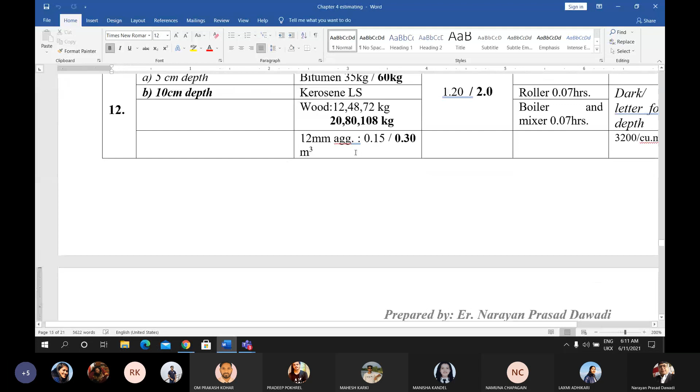Hello? Hello? All of you hearing me? Hello? Hello? Please, someone talk with me here. Have you heard me or not? Hello? Yes, sir. We are hearing, sir.

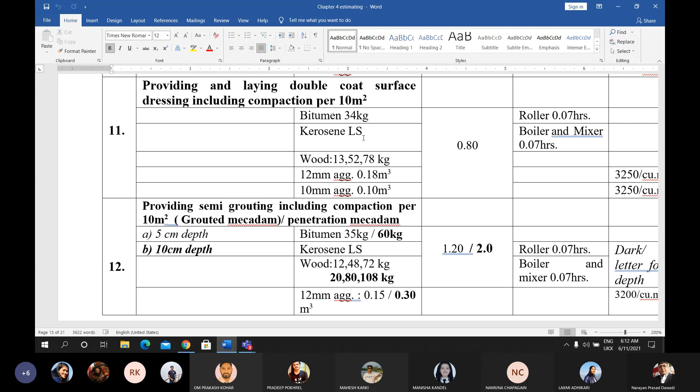And I think I have completed the analysis of rates for the road work, isn't it? Yes, sir. We have started the pipe work. Hello? Let me move to the pipe work. This is the analysis of rates for pipe or sewer line, generally using the hume pipe.

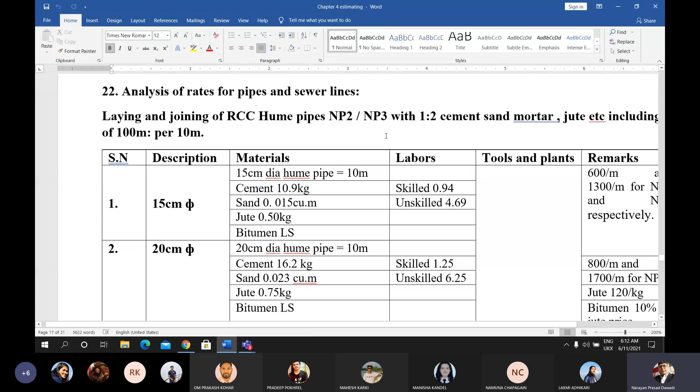Have we finished it or not? Hello? Did we start this in the previous period or not? Hello, please tell me. So, had we started this? Hello? Just started, sir. Up to which number? Serial number. We have just started this, isn't it? Yes. Now, let me start.

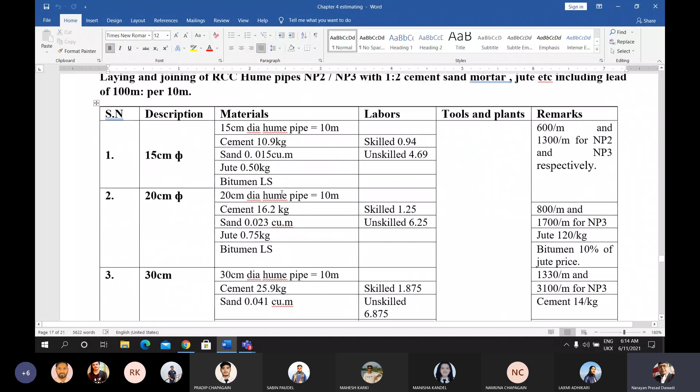Let me start the analysis of rates for the hume pipes or concrete pipe or RCC pipe. This is generally done for the convenience of the sewer lines. And generally, the diameter of the pipe is more than 15 centimeter. And you may be asked in the exam for providing the analysis of rates of hume pipe, providing and laying analysis of rates of hume pipe.

And if you are not given a specific dimension, then you can do it for any dimension also. But if a dimension is not specified, then do it for the diameter of 90 centimeter. Okay, I have a diameter 90 centimeter put here in the bracket. So it is most important in terms of all other dimensions.

Okay, now these hume pipes are generally available in the market, and generally of 2.5 meter length. It has the collar provided, and one pipe is joined with another by inserting the collar into the other pipe, and before inserting the collar, jute is applied as the hemp. That jute is generally immersed in liquid bitumen, and that coated jute goes round the collar of the one pipe, and it is inserted into the other pipe.

And from the outside, the plastering band is done with the help of 1:2 cement sand mortar. In this way, we can join the pipe. And hume pipe is generally available at 2.5 meter. Okay, 2.5 meter length.

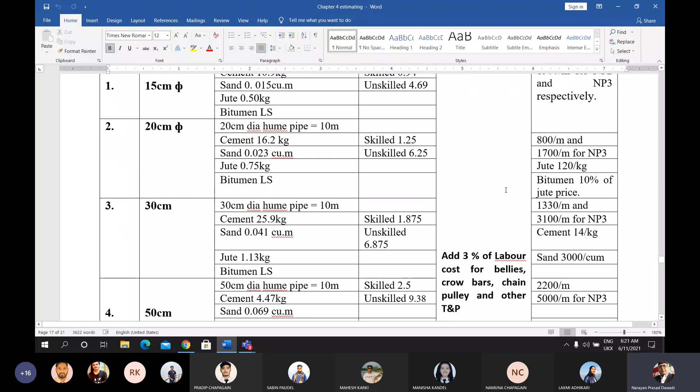That cost may be taken as 3% of the labor cost. 3% of the labor cost is provided as the tools, plants, and equipment cost for lifting and placing of the pipe. Okay. In this way, you add 3% labor cost for ballies, crow bars, chains, pulleys, and other tools, plants, and equipment for the carrying and laying of the pipe. And this is the analysis of rates for 15 centimeter diameter. The skilled manpower is 0.94 number, and for the 15 centimeter, 10 meter length pipe, the unskilled manpower is 4.69 number. This is taken from the norms of the government.

Okay. After putting the value of skilled labor as 1200 per number and unskilled labor as rupees 900 per number, you can do the rate analysis by yourself. You know the rate of the hume pipe. You know the cost of the cement, because cement per bag is 700 rupees. In a bag there is 50 kg of cement, and 1 kg cement will cost rupees 14. Sand per cubic meter is 3000. Jute per kg is 120 rupees, and bitumen can be taken as a lump sum of 10% of the jute price. That total amount can be given for the bitumen.

Okay. Now, for 20 centimeter diameter, in this way I have provided the material, skilled and unskilled manpower, and the rate of the pipes. You can do the rate analysis by yourself by providing the suitable rate of each material. For 20 centimeter diameter, the hume pipe is 20 centimeter diameter, 10 meter, cement 16.2 kg, sand 0.023 cubic meter, jute 0.75 kg, and bitumen lump sum. The skilled manpower is 1.25, unskilled manpower is 6.25, provide 3% labor cost for tools, plants, and equipment. The rate of the 20 centimeter diameter NP2 pipe is 800 per meter, and if you use the NP3 pipe, that rate will be 1700 per meter. This is the rate analysis for 20 centimeter diameter pipe.

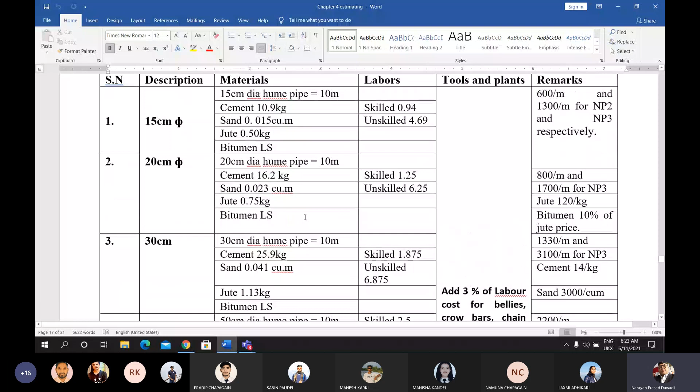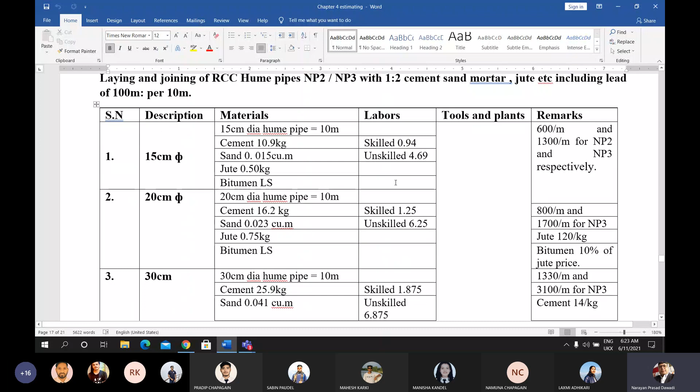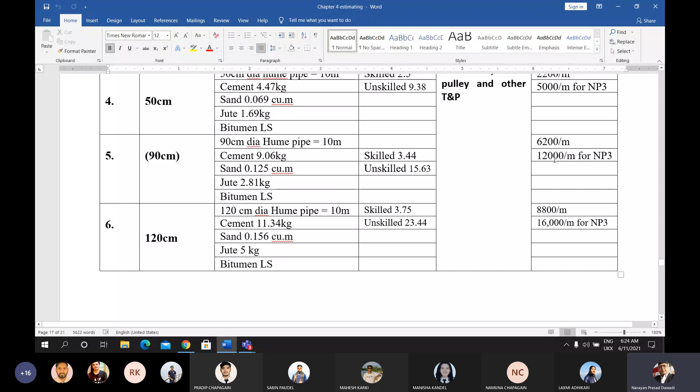In a similar way, you can do the rate analysis for 30 centimeter, 50, 90, and 120 centimeter. If in the exam the diameter of the pipe is not specified, then do it for 90 centimeter diameter. For the 90 centimeter diameter pipe, 10 meter length is required. Cement 9.06 kg, sand 0.125 cubic meter, jute 2.81 kg, bitumen lump sum, skilled manpower 3.44 number, and unskilled manpower 15.63 number. The rate for 90 centimeter NP2 pipe is 6200 per meter, whereas the NP3 pipe cost is 12,000 per meter. This is an expensive pipe. As the diameter increases, the cost rate also increases. This is the analysis of rates for RCC pipe.

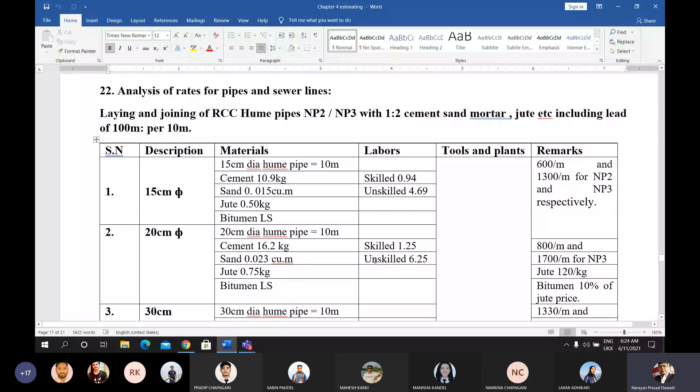You can do it for any other diameter in the exam if the diameter is not specified, but basically do it for 90 centimeter, because we need the higher diameter pipe for laying of sewer lines. Okay, now you can do rate analysis by yourself. Do 5 or 6 rate analyses regarding NP2 or NP3 pipe for laying and joining of RCC concrete pipe or hume pipe.

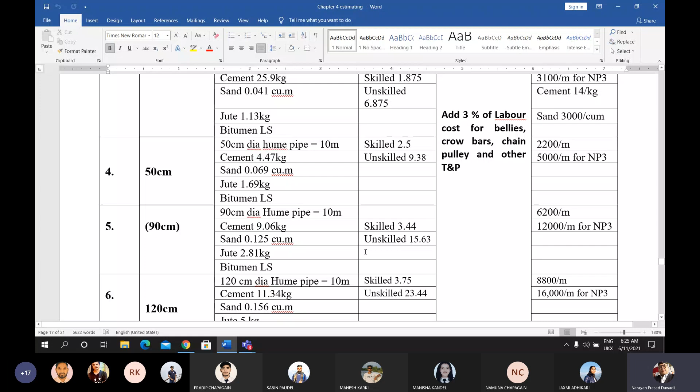बुझे सर बुझे. Now, let me go to another heading: analysis of rates for supplying and laying of GI pipes with fittings per 100 meter. This is another type of pipe, GI pipe. GI pipe is generally used for the water supply and the internal plumbing of the house. And we need different types of fittings for the GI pipe.

There may be a nipple, a tee, an elbow, a gate valve and other fittings used for laying the GI pipe. We need different types of taps and other varieties as per our requirement. For that case, we must know all the things that are going to be installed or supplied according to our need. So I am just providing the analysis of rates for GI pipes, whatever types of fitting are used in the laying of the pipe.

For the fittings, 25% extra length of pipe is considered. Because the cost of the fittings is also very expensive, we have to provide some fittings: sockets, elbow, T, union, nipple, gate valve, different types of valves can be used for fitting the GI pipes. For such things, I have provided a 25% extra length cost for the fittings.

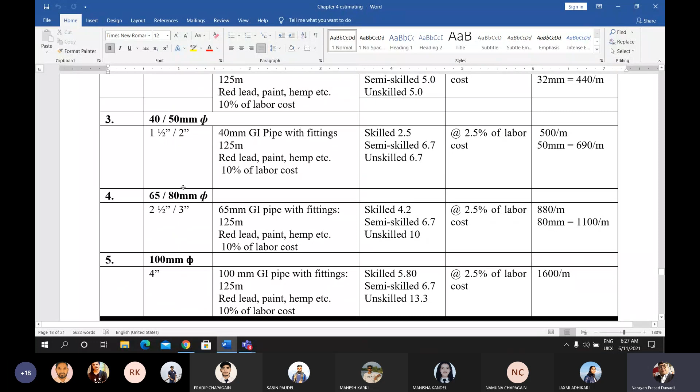100 mm is 4 inch, 80 mm is 3 inch, 65 mm is 2.5 inch, 40 mm is 1.5 inch, and 50 mm is 2 inch. 25 mm is 1 inch, and 32 mm is 1 1/4 inch. 15 mm is half inch, 20 mm is 3/4 inch.

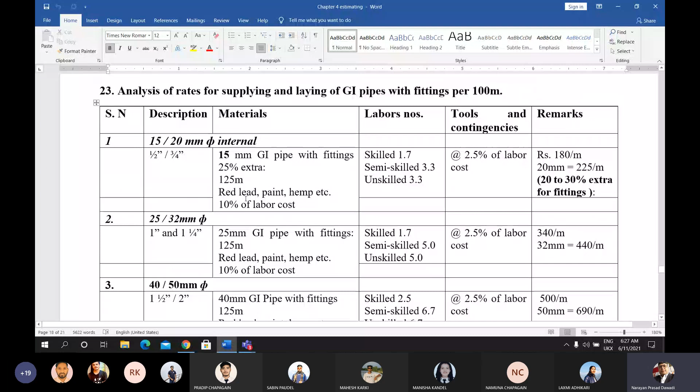These 15 mm, 20 mm, 25 mm pipes are iron pipes coated with zinc, galvanized, and this is called GI pipe, galvanized iron pipe, basically used for water supply lines. GI pipes can be used for the connection of water from the municipality line to the internal plumbing system, or the internal water supply system. Okay, this is the GI pipe.

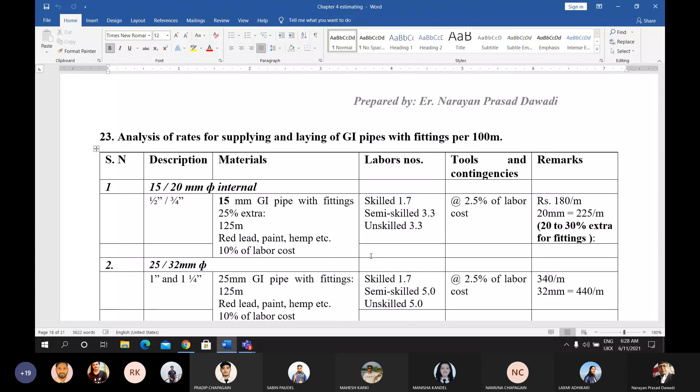The diameter may be different. You may be asked with a different diameter, or the diameter may not be specified in the exam. At that time, you can take any diameter of the pipe and do the rate analysis. For 15 and 20 diameter pipe, the rate analysis is the same, because for fitting 15 and 20 diameter pipe, the skilled, semi-skilled, and unskilled labors are the same. That's why 15 and 20 internal diameter pipes are considered in the same heading.

If you have to provide analysis for the 15 diameter pipe, then write 15 diameter GI pipe with fitting charge 25% extra. If you have to provide 20 diameter pipe instead of 15, write here 20 diameter GI pipe with fittings with 25% extra. In this way you can provide this. For the 100 meter length, if you provide 25% extra, then the length of the pipe will be 125 meter.

And for joining the pipe, we need the hemp, M seal, etc. We need the M seal, we need the hemp for joining the pipe. This red lead is the M seal, and the hemp is the washer.

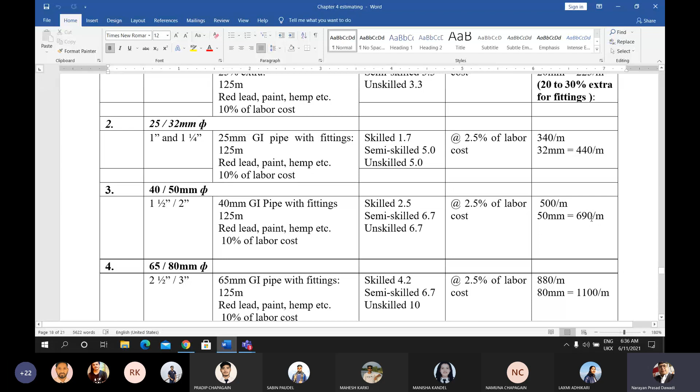And for the 40 and 50 diameter pipe rate analysis, the number of manpower is the same. That's why instead of 40 diameter pipe, if you have to provide the 50 diameter pipe, then you can write 50 instead of 40 here. Other things remain the same, and provide the rate for the 40 as 500 per meter and the 50 as 690 per meter. In this way, do rate analysis for all the diameters of the pipes.

Okay. Hello. Hello. Have you all understood this? Hello. What am I telling here?

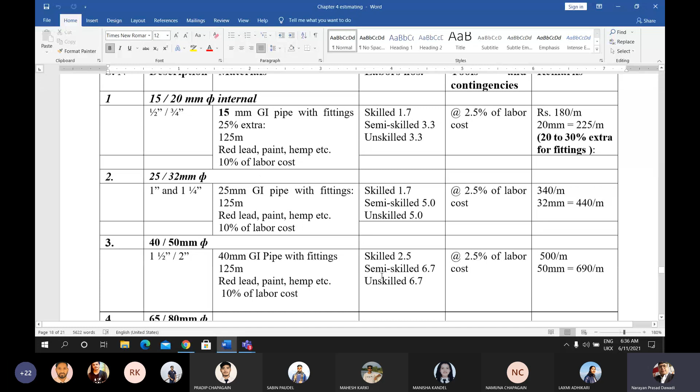Yes, hello sir. Now you can do rate analysis by yourself after knowing these materials, manpower, and the equipment. Okay, you can do rate analysis by yourself.

The rate of the pipe per meter is provided in the remark column. You have to provide 20 to 30% extra. You may take 20% extra, or you may take up to 30% extra.

You can provide here. Okay, for we have the 100-meter pipe length, we need 100-meter pipe length. 25-meter extra is for the cost of fittings - these fittings may be elbow, nipple, socket, T, and other fittings, valves, etc.

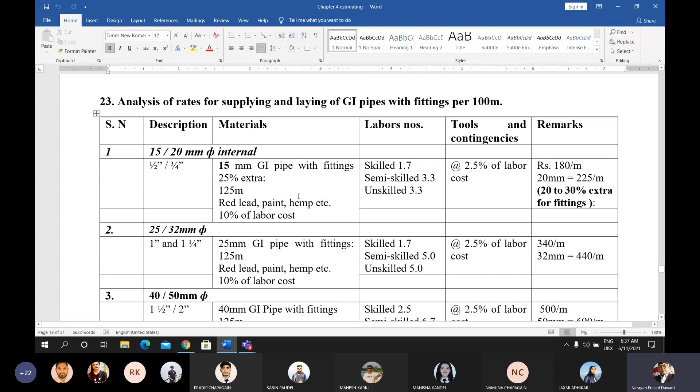And what number of these things are needed here? I don't know, that may be used according to the need of the client. So for that I have provided 25% extra length of the pipe's cost for providing the fittings. Do you understand this?

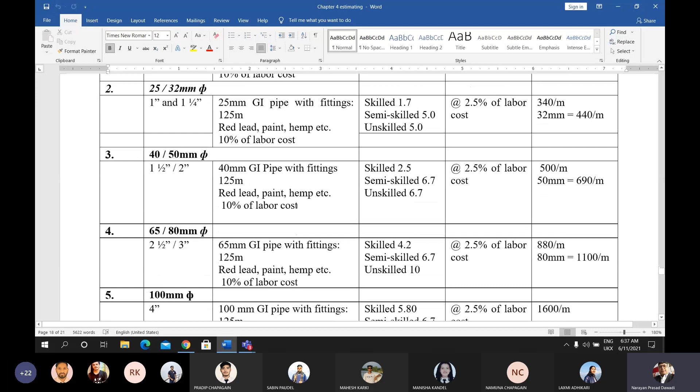Yes sir. Now do it by yourself in the tabular format to know the cost of each 100-meter pipes for supplying and laying, using the rate analysis format.

Now, analysis of rates for supplying and laying of high density polythene pipes. This is the plastic pipe that can be used for water supply as well as for the drainage system - internal drainage system, rainwater drainage system, or other drainage systems using polythene pipe.

Polythene pipe may be available from small diameter to larger diameter - that is, it may be available as 20, 25 diameter, 32 diameter, 40, 50 diameter, 63, 75, 90, 110, and 125, and much more diameters can be available in the market. But in the examination, you may generally be asked about small diameter high density polythene pipes.

They are also used for water supply. If we have to use low cost pipes rather than GI pipes, we use high density polythene pipes. Now the analysis of rates for supplying and laying of high density pipes and fittings for 1,000-meter length of the pipe with the butt welded joint.

That is, the plastic pipe is joined by heating the pipes with a heating mirror, and that pipe is joined - that is the butt welded joint.

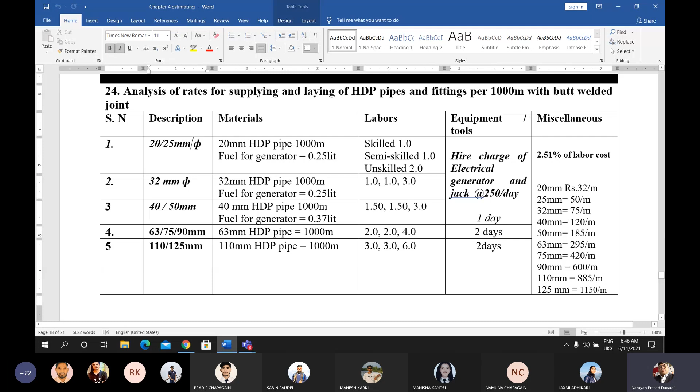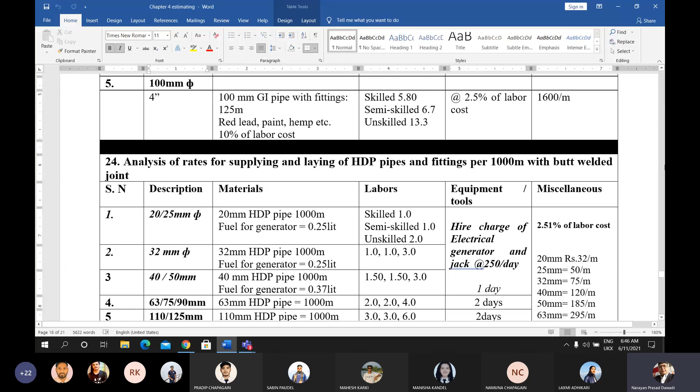Now this is the rate analysis of pipe. I did rate analysis for MS pipe, GI pipe, and high density polythene pipe, but I did not do it for cast iron pipe, because cast iron pipes are generally not used these days, since they are heavy and costly. They are replaced by polythene pipes these days. So I have not done rate analysis for the cast iron pipe.

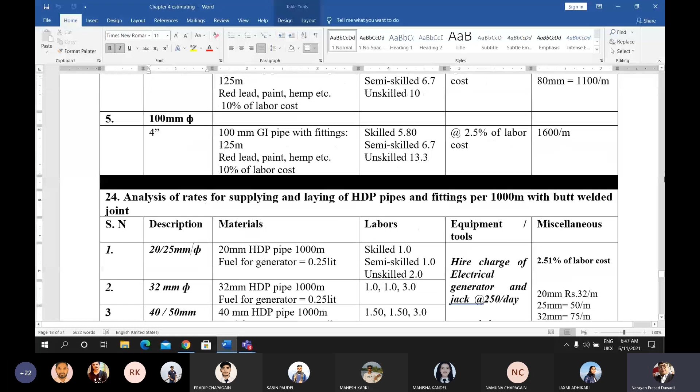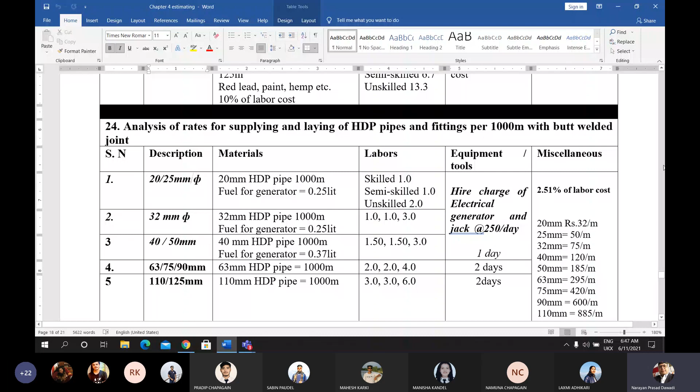That may not be asked in the examination, so I did it for MS pipe, GI pipe, and high density polythene pipe. If asked in the exam and diameter is not specified, do for any diameter; if diameter is specified, do for that diameter. You have to provide rate analysis in tabular format: material cost, equipment cost, labor cost, miscellaneous cost, contractor profit overhead, and contractor tax or VAT. Do a rate analysis by yourself using these materials, labors, equipment, and miscellaneous cost.

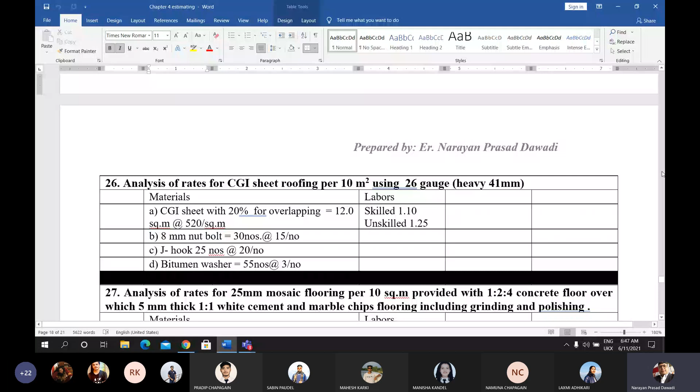Now, analysis of rate for CGI sheet roofing for 10 meters square, using 26 gauge heavy 41 thickness CGI sheet. This is the analysis of rates for the roofing purpose.

We use the Jasta Pata - the corrugated galvanized iron sheet available in the market in different gauges: 22, 24, 26, 28, 30. According to the gauges, there may be three types of tins available: heavy, medium, and light. The thickness of the 26 gauge tin CGI sheet is 41; this is the heavy thickness, and I have done the analysis for this.

CGI sheet for the laying and roofing, using the CGI sheet per 10 meters square of the area, provide 20% extra for the overlapping of the sheet.

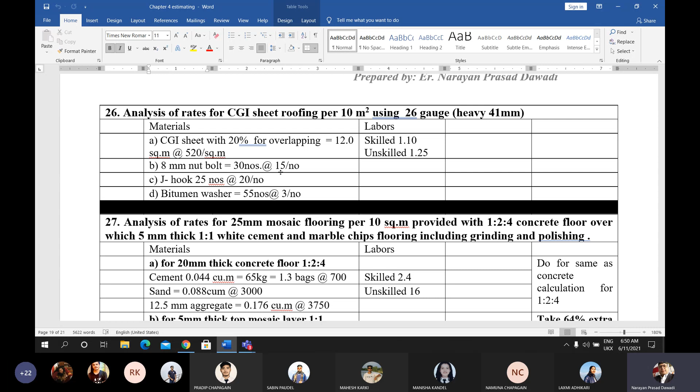In a bundle of tin, there are 72 feet, and one CGI sheet's width is 2.5 feet. If you multiply 72 by 2.5 feet, you will get the total area of the sheet per bundle. You have the rate per bundle as given in the previous slide.

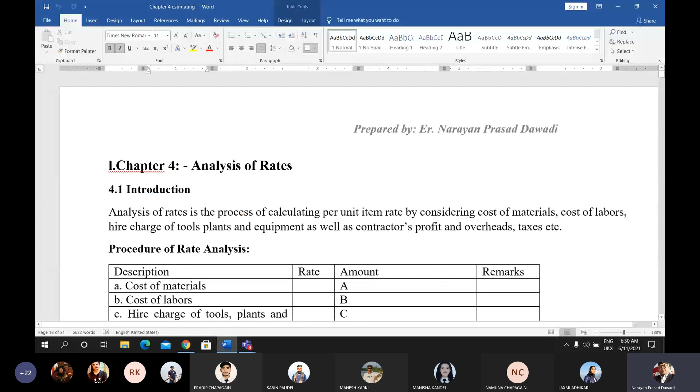If you multiply 2.5 with 72 feet, you will get the total area per bundle of CGI sheet, and that square feet can be converted into square meters by dividing by 10.76, since 3.281 feet equals one meter, and 3.281 times 3.281 gives 10.76 square feet per square meter.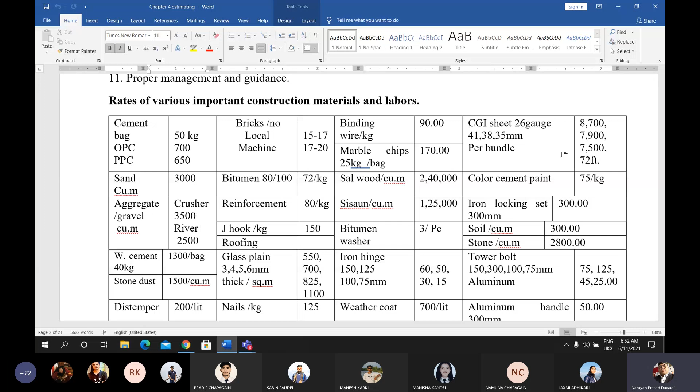So for that bundle square meter, if you use the 41mm thickness 26 gauge sheet, that will cost 8700 rupees, and dividing that by the area gives the per square meter sheet cost. You can calculate this yourself.

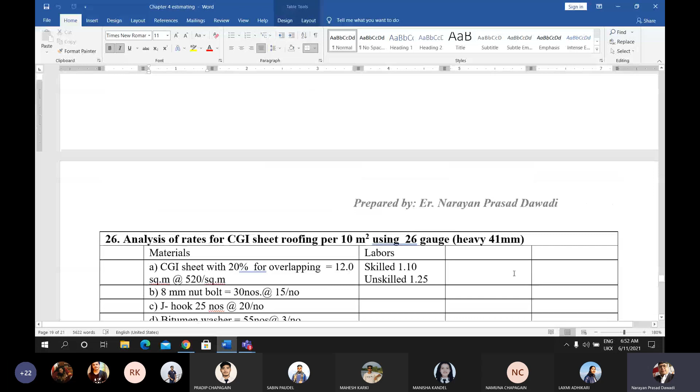So I have directly converted that amount rate here at rupees 520 per square meter. So you know the CGI sheet quantity is 12 square meters, and the rate per square meter is 520 rupees.

Now for roofing purpose, we need nut and bolt hooks etc. for fixing them over the rafters, battens or purlins provided for roofing purpose, and you may use 8mm nut bolts.

30 numbers are used for the 10 square meter at rupees 15 per number, and the 8mm diameter J hook, 25 numbers at 20 rupees per number. The bitumen washer is used before nut bolting - for 10 square meters, 55 numbers are used, available in the market at 3 rupees per number.

Now labor required for 10 square meter roofing purpose: skilled manpower is 1.10 number, and unskilled manpower is 1.25 number. Skilled manpower rate is 1200 rupees per number, and unskilled manpower is 900 rupees per number.

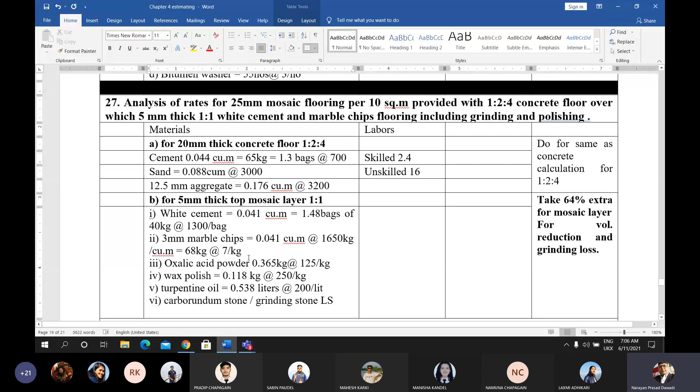Now, analysis of rates for 150 mm PCC 1:2:4 in canal lining for 10 square meters, lead 30 meters, lift 1.5 meters. This is canal work, and this is for lining purposes using concrete lining, PCC, plain cement concrete lining, which is 150 mm thick. Calculation of material is the same as 1:2:4 concrete work.

For 10 square meters, 10 into 0.15, you will get the volume of the concrete. This is the wet volume of concrete, which is multiplied by 1.54. You will get the dry volume of concrete, and that is divided by the total proportion. You will get the volume of the cement, and that volume of cement is multiplied by 2 for the volume of sand, and multiplied by 4 for the aggregate; the quantity of aggregate is calculated in a similar way, okay.

And for this analysis of canal lining using PCC work, we need skilled manpower as 1 and unskilled manpower as 8 numbers, and the rate of skilled is 1200 per number, and unskilled is rupees 900 per number. You can do the rate analysis by yourself using this data, okay.

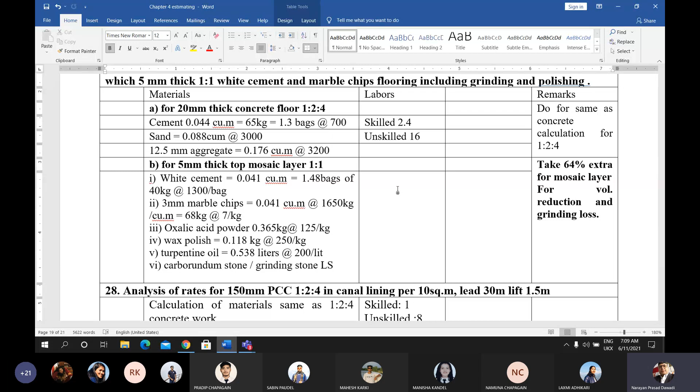This is canal lining using PCC 1:2:4, which is the same as the 1:2:4 concrete work for calculating the material. Because the total proportion is 7, you can get the dry volume of the concrete mix by providing 54% extra, as in the previous PCC and RCC material calculation. The total wet volume of concrete will be 10 square meter into 0.15.

You will get the volume of concrete required for lining, and that is the wet volume. For dry volume, take 54% extra: 1.54 into the wet volume gives the total dry volume of the concrete material, and that is divided by the total proportion of 7. You get the volume of cement; multiplied by 2 you get the volume of sand, and multiplied by 4 you get the quantity of aggregate. Knowing the rates of cement, sand and coarse aggregate, the material cost can be worked out.

For this purpose, skilled manpower is one number and unskilled manpower is 8 numbers, at rates of 1200 and 900 per number respectively. You can find the material cost and labor cost. For tools, plants and equipment, provide 3% of the labor cost. After adding material, labor and tools cost, provide 15% contractor profit and overhead, then add 13% contractor's tax and VAT. In this way you can do rate analysis by yourself.

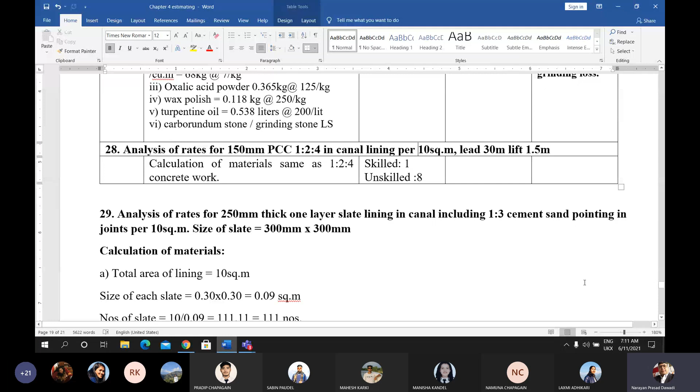This is the analysis of rates for 150 mm PCC 1:2:4 canal lining per 10 square meter, lead 30 meter and lift 1.5 meter. Now, analysis of rates for 250 mm thick one layer slate lining in canal, including 1:3 cement pointing in joints, per 10 square meter. Size of slate is 300 mm by 300 mm. This is another rate analysis calculation of material. Total area of the lining is 10 square meter.

Size of each slate is 0.3 by 0.3, so 0.09 square meter is the area of the slate. Number of slates is 10 divided by 0.09, which gives 111.11, say 111 numbers. Taking 15% extra, the number of slates required will be 111 into 1.15, which gives 127.65, which can be considered as 125 numbers, say.

Taking the mortar joint for pointing as 10 mm, the total surface is 10 square meter, and with a pointing thickness of 10 mm, 10 into 0.01 gives 0.10 cubic meter. Taking the volume of mortar for pointing as 25% of the volume of plaster surface, the volume of mortar required will be 0.025 cubic meter.

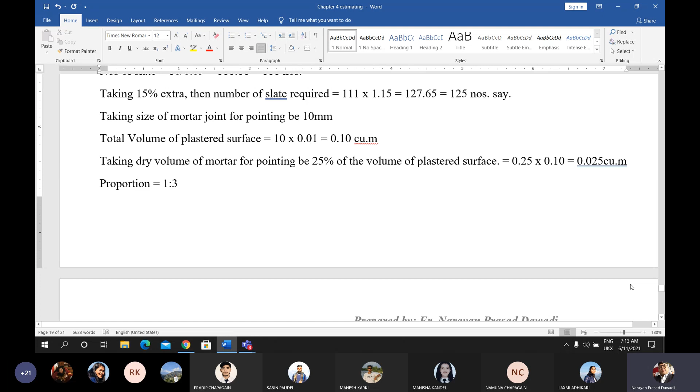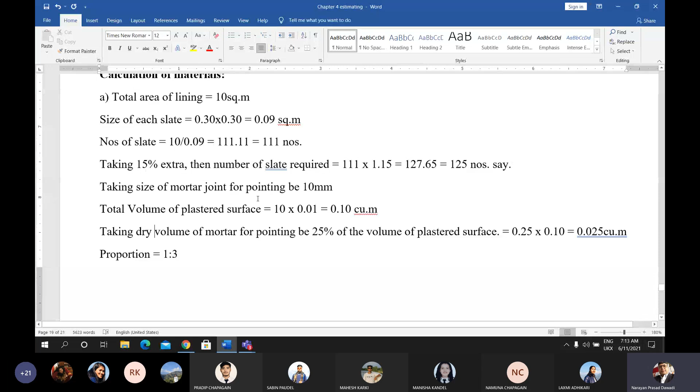After finding cement, you can take the water cement ratio as 0.80, giving water as 7.2 liters. For this, skilled manpower is 2 numbers and unskilled manpower is 3 numbers for laying and pointing of the slate over the surface. This is the material. You have to make the rate analysis using this material.

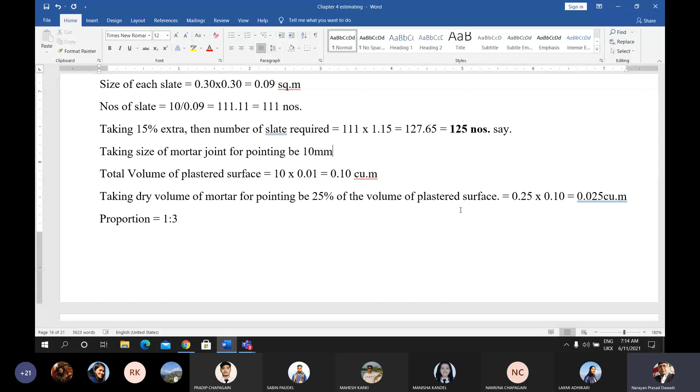First of all, make the table and write the heading: analysis of rates for providing this, up to the size of the slate. Write this heading above the table. Now for material, first one, slate 300 mm by 300 mm, quantity 125 numbers, and provide the rate of the slate.

The slate rate may be provided in rupees, because the size of the slate is 300 by 300 mm, one square foot slate, and the thickness of this layer is 250 mm. The thickness of this slate is 250 mm, which is a very thick slate. That's why its cost will be high, so provide a cost of rupees 100 per number.

Okay, or 150 per number, 100 per number or 150 per number, and you will get the cost of the slate, 125 into 150 or 100. You will get the cost of the slate. Now, B cement. Cement is 8.6, okay, 9 kg, 0.1728 bags into 50. I will get it in terms of kg, 9 kg cement, and the cost of cement is 14 per kg. You will get the cost of cement.

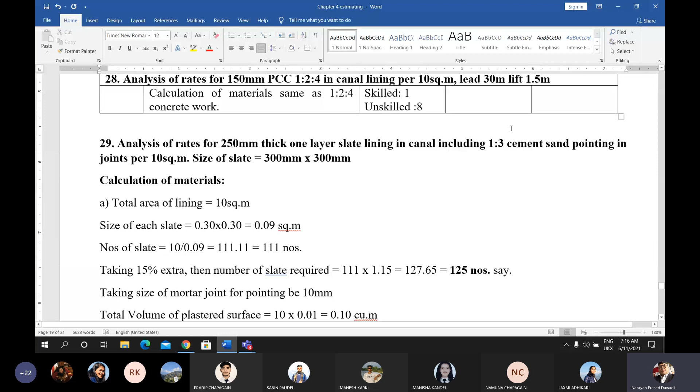You will get the total cost, and provide 15% contractor overhead. Again add and provide 13% contractor's tax or VAT. Okay, and add, you will get the grand total for laying the canal lining using the 250 mm thick slate of this size, which is provided with 1:3 cement sand pointing. Okay, this is the analysis of rate for canal lining using the slate.

Now, average 300 mm thick boulder stone work with 1:3 cement mortar for canal lining, lead 30 meter, lift 1.5 meter, per 10 square meter. This is the boulder lining using the cement mortar. Now, volume of boulder lining is 300 mm, that is 0.3, into the area of 10 square meter, 3 cubic meter. Taking 56% of boulder work for dry volume of mortar, you will get 0.56 into 3, 1.68 cubic meter.

Now cement, for this it is 1.68 divided by 4, you will get 12 bags. Sand 1.26 cubic meter, and these are the materials. You need the boulder stone, okay. You need the boulder stone for 10 square meter area, and the volume is 3 cubic meter, so the boulder stone required is 3 cubic meter. The mortar with the boulder stone is 1.68 cubic meter. That is for calculation of the cement and sand.

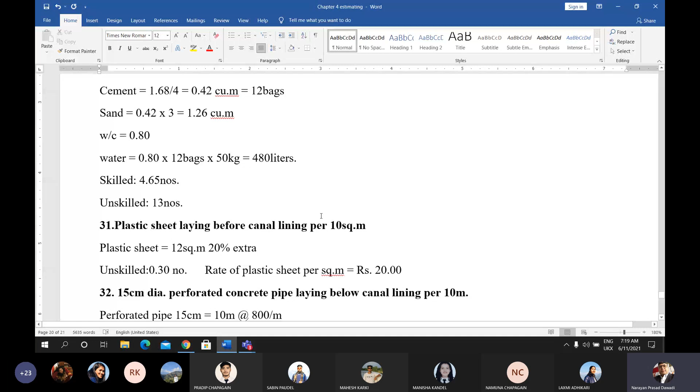Okay, you can provide a water cement ratio of 0.8 here. Water will be 0.8 into 12 bags of cement, 50 kg per bag, and 1 kg of water is equal to 1 liter, which gives 12 into 50 is 600, into 0.8, 480 liters. Okay, you can find the water also.

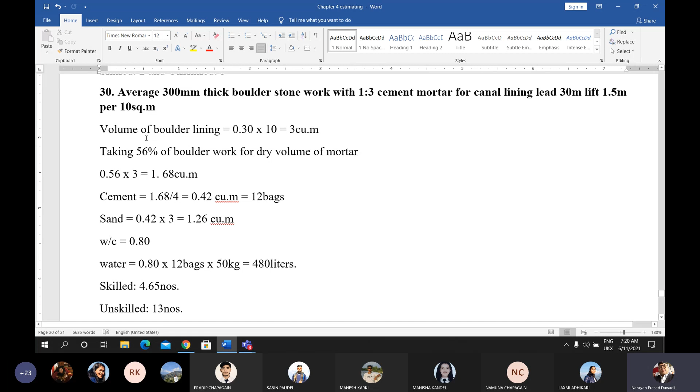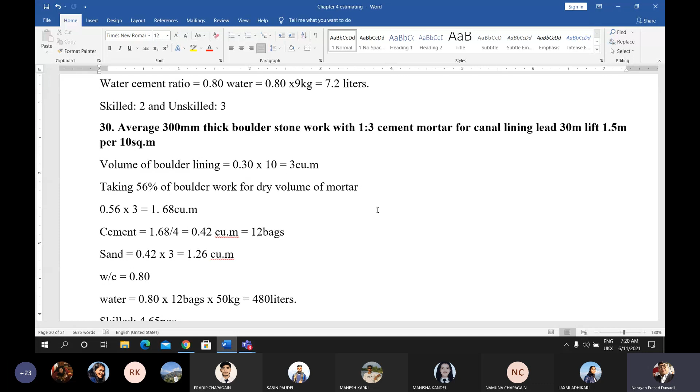And after knowing the boulder material: boulder means stone, that is block stone. These are boulders that may be available from the mine or from the river bed. Boulder means stone, boulder lining means stone lining. Stones are boulders having a greater size, and the boulder quantity is 3 cubic meter. The cost of the boulder may be taken as rupees 1500 per cubic meter or 2000 per cubic meter. You can provide it this way.

Now, cement is 12 bags, sand is 1.26 cubic meter. This is the material I have calculated: boulder stone 3 cubic meter, cement 12 bags, sand 1.26 cubic meter, water 480 liters. This is the quantity of material. And for labor, skilled 4.65 number and unskilled 13 numbers, because you have to carry and break the boulder. The boulder is 3 cubic meters, so more labor is required here, because the boulder is heavy and has to be laid on the bed and sides of the canal for lining purpose.

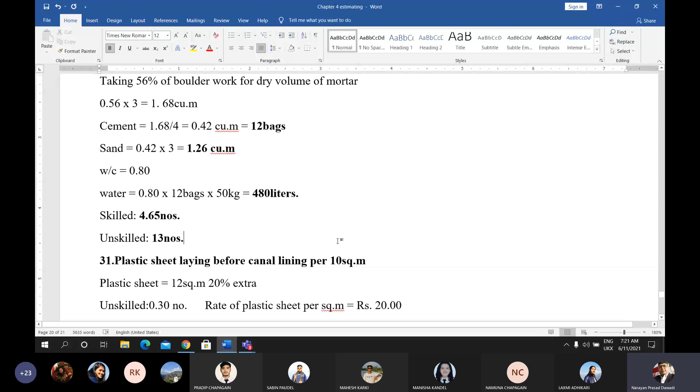Okay. Now, item 31, plastic sheet laying before canal lining for 10 square meter. The area is 10 square meter; provide 20% extra for the plastic, because we have to provide the overlap of the plastic for lining.

Okay, before lining we use the plastic. Over that we provide the boulder lining, or another type of lining can be provided over the plastic sheet, so we need 20% extra for the total area of the plastic that is required for the surface to be lined. Okay, 10 square meter area is required for the lining surface, and provide 20% extra. The plastic sheet required will be 12 square meter. You can write here

20% extra. Now, on skill, we need only plastic. We don't need other materials, because we have to lay the plastic sheet over the prepared surface. Now, unskilled manpower is about 0.30 numbers. We don't need skilled manpower here. Rate of plastic sheet is rupees 20 per square meter.

Material cost will be 12 into 20. That will be material cost, and the labor cost is 0.30 into 900. Add material and labor, and provide 15% contractor overhead. Again, provide 13% contractor tax for laying the plastic sheet before lining per 10 square meter area.

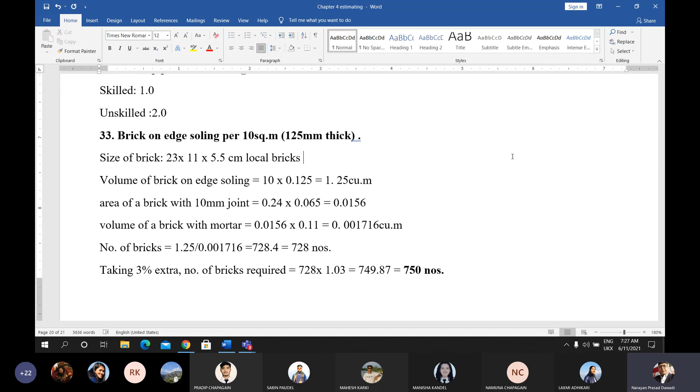Now, taking 3% extra, the number of bricks required will be 728 into 1.03. You will get 749.87, that is 750 numbers. You need 750 bricks here. Now cement 20 kg, skilled manpower 2 numbers, unskilled manpower 4 numbers, and sand 0.10 cubic meter.

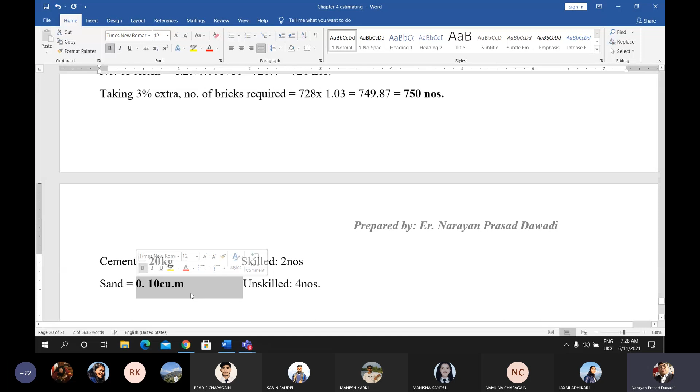After knowing this, you can do rate analysis by yourself. The material will be bricks 750 number, cement 20 kg, sand 0.10 cubic meter. Okay, if you want to provide the water, then water cement ratio is 0.8. You can provide water. Okay, now the skilled manpower is 2 number, unskilled manpower is 4 number.

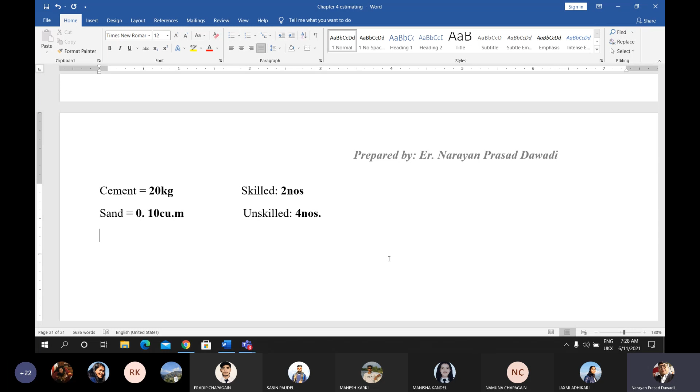You don't need to transfer equipment here. And after finding the cost of the material, cost of labor, provide 15% contractor profit overhead and 13% contractor's tax. In this way, you can provide the analysis of rate of all these items.

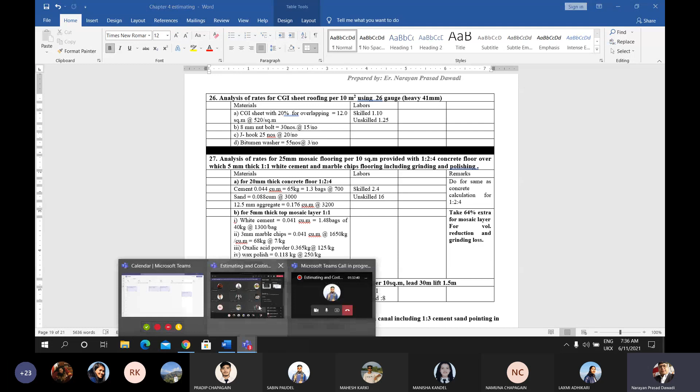32 pupils are appearing here, only 32 numbers attendance. How are the others, where are they? Fine, other your friends. Only 32 numbers are present here, you have 48 numbers, all 46 47 numbers all together in your class.

Only 32 students are present, sir. Hello sir, can you hear me? Yes, I am hearing you.